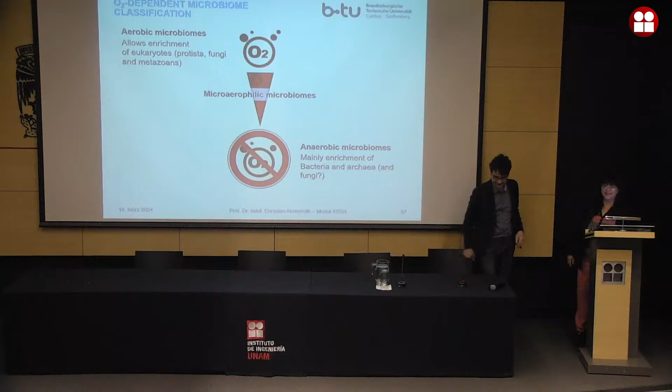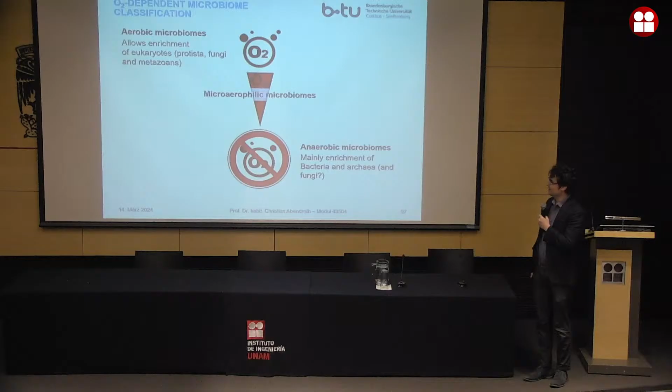Okay, welcome everyone to our lecture today. Actually, we almost finished yesterday, we just had 2 slides left, so we will finish these 2 slides and then move to the next topic. I already provided this file to you, so you should have it by now. It's basically a summary which is missing.

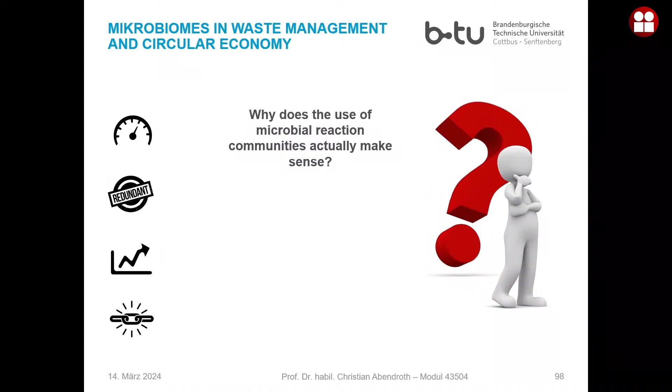So we ended with the classification of microbiomes into aerobic and anaerobic microbiomes, and also this intermediate with microaerophilic microbiomes. We also discussed which advantages the application of microbiomes has. You gave some good answers, and here's just a short summary. I searched for some sources supporting this information. For example, microbiomes allow a rapid conversion of almost all organic compounds because we have a high metabolic diversity. We have a really high redundancy and high adaptability, which is also what we discussed.

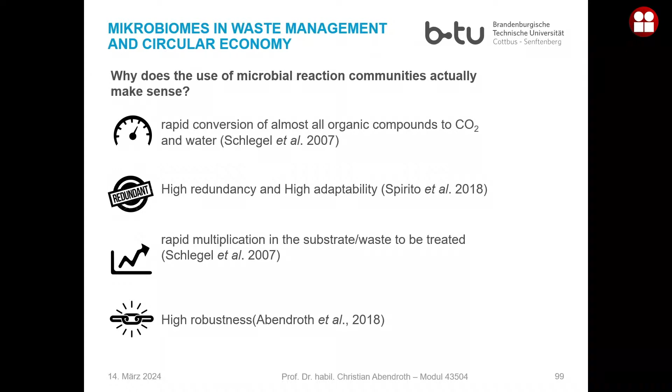We have a rapid growth, so there are many microorganisms which can grow relatively fast, and after a short while you will reach already a high cell density. And lastly, there's a high robustness, so it's really difficult to change the microbiome in order to change its functionality. It's really hard to disturb the process. Usually you can throw everything into a biogas plant and then the microbes are doing the job, and in the end you're getting a lot of methane.

So with this, the last chapter from yesterday is done, and we can shortly summarize it. We talked about oxygen and the possibility to separate different microbiomes based on oxygen. We also talked about the possibility to use oxygen to fasten up microbiomes, which was really important for wastewater treatment, but this does not allow the accumulation of really valuable metabolites that we could use to sell to the industry.

This is then possible with anaerobic conditions, where we have very low redox potential, and oxygen is not the final acceptor for the electrons, and therefore we have not a complete degradation of most of the substances that we have present, and thereby we are producing methane or other substances of interest.

Although this is nice, it's really difficult to enrich microorganisms under anaerobic conditions. They are washed out easily because they grow slower than with oxygen. To circumvent this problem, we can apply some growth bodies, or we can use UASB reactors where we have some selection pressures that support the formation of granules. We can also use a membrane reactor to somehow retain the biomass in the reactor.

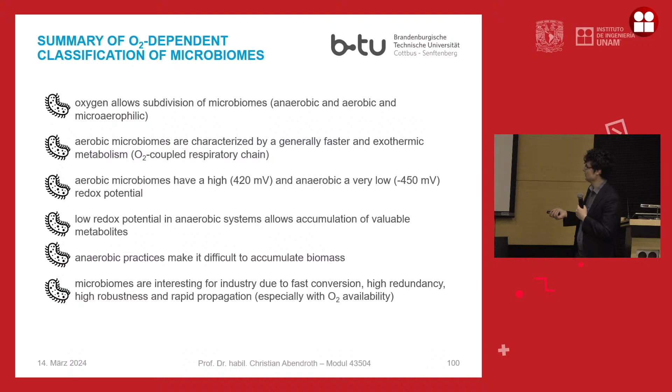So that's it, we are done with this, and now we can already move to the next presentation. Can you please change the slide, yeah, thank you.

Okay, thank you. Then let's start with our lesson for today. So today we talk a little bit more about engineering. We are leaving for a moment the biological perspective, and we will talk more about anaerobic digestion, how it's working in general, and we will also talk a little bit about dark fermentation.

So what is anaerobic digestion? What do you understand under anaerobic digestion? Yes? And how does an anaerobic digester look like? Yes. But can you imagine a reactor, how the reactor would look like? How would we perform anaerobic digestion? How would we start the whole process? You don't know? Anyone else has an idea?

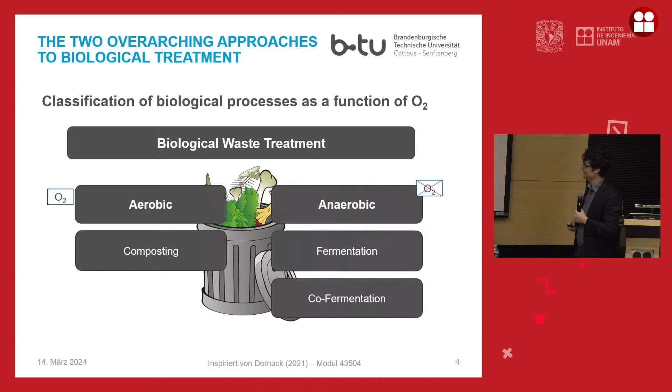Then we have these systems here: composting, and here I differentiated between fermentation and co-fermentation. Very often we apply co-fermentation in the field of biogas production, but sometimes we also have fermentation where we have just one single substrate.

This is, for example, the case in wastewater treatment, where we have just this sludge that we are receiving from the waste activation or sludge wastewater activation, and then the sludge is brought into a digester where we are producing biogas. We could also think about having a bioreactor filled with manure, and then we feed it with a certain substrate. If we just use one single substrate, this could also be a fermentation and not a co-fermentation.

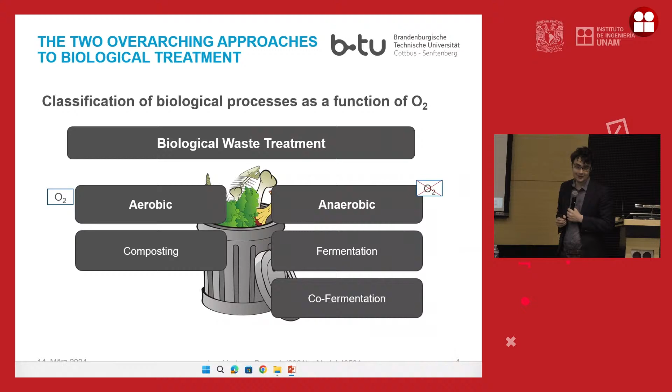Usually a stirrer is still inside, but that's basically all. It's a really simple system that you fill with an active medium. Very often in Germany we just use cow manure, which contains all the microorganisms we need to produce biogas. Once the whole thing is filled with cow manure, we can feed it - we take some solid biological waste and feed it into the biogas plant, and then all the microbes eat it and convert it into biogas.

The biogas is collected, as you already mentioned, and then we can incinerate it in a CHP plant to produce electricity and heat. We also have the digestate, that's what you are working with, as I understand.

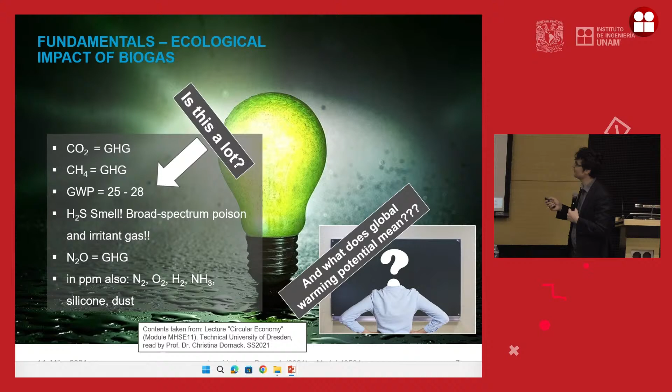But then there are some gases which are much worse than carbon dioxide, as for example methane. So if you don't know the term, I will not ask the question whether it's a lot, because then I have to explain the term first.

So the global warming potential describes a relation of other gases to carbon dioxide. For example, methane has 25 until 28 times the global warming potential of carbon dioxide. So it's 28 times worse than carbon dioxide. Of course, we don't want the methane in our atmosphere therefore.

So it's much nicer if we collect it, then we incinerate it. By this, we get some energy. And after incineration, it's just CO2, which is less dangerous for the atmosphere than the methane.

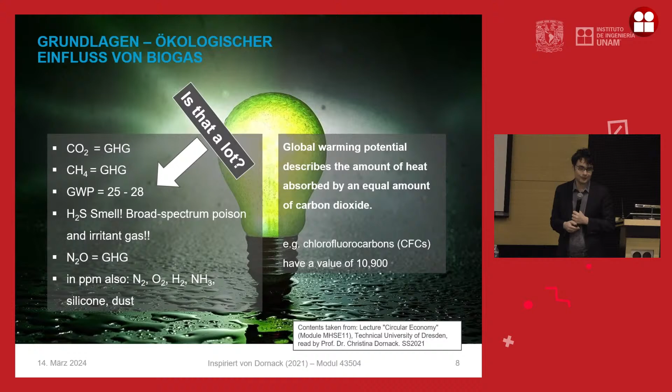There are some gases which are much, much worse. That's why I was asking, is this a lot? For example, there are chlorofluorocarbons, and they reach a value up to 11,000. So they are 11,000 times as bad as carbon dioxide. And of course, these gases should be forbidden.

I don't know whether this is always the case in every country, but at least in Germany, it's not allowed to use such gases for industrial processes anymore, or at least it should be reduced to a minimum.

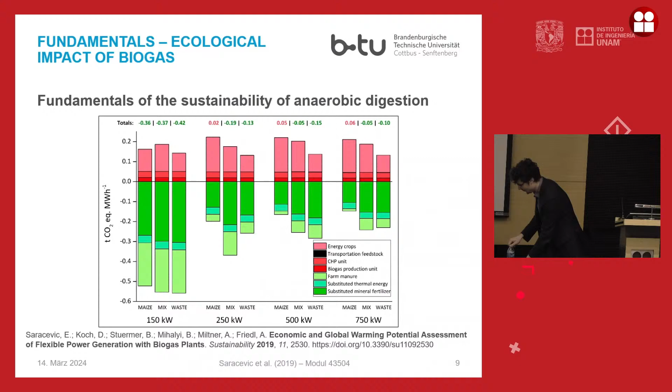So I don't know whether they did this based on a life cycle assessment. I don't know how they calculated this exactly, I would have to read the article again. But we could assume that with life cycle assessment, you could make a graph like this, estimating the production of CO2 and the savings. So we could use such a method to show this.

But assuming that this is all true, what we are seeing here in this diagram, and I would believe it's true, it's still strange that the small plants are so sustainable. So why are these small plants so sustainable?

No idea? Anyone else has an idea? I'm guessing, reading from the graph and using the information from it, that the most CO2 we save is from substituting thermal energy and substituting mineral fertilizer. I'm guessing for larger plants, there's not enough production of energy or fertilizer for it to fully substitute the amounts that need to be used. So that is why you don't have as much savings. There's another reason, though.

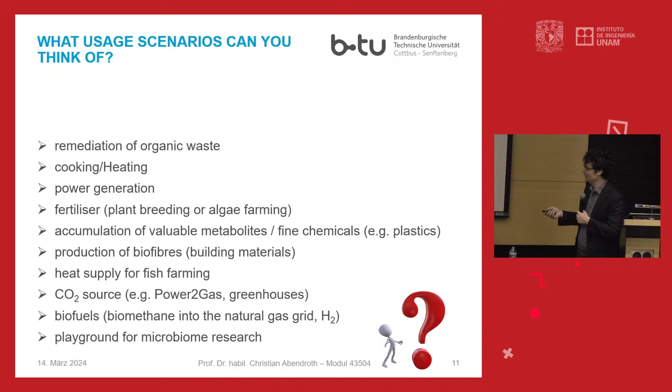We can also use the heat directly at a fish farm connected to the digester to heat up the water. We can also use the CO2, because usually we just incinerate the biogas, but then we have a high concentration of CO2, and it's difficult to get gases with very high concentration, very pure CO2, and you could use them, for example, in greenhouses to better grow plants. You also mentioned biofuels. And then, of course, we can add the research to understand how microbiomes are functioning, to just better understand this microbial level. Okay, nice, you got most of the options.

So, as I told you in the very beginning, we can differentiate between monofermentation and co-fermentation. And apparently it's problematic to just perform monofermentation. I wonder whether you have any idea why is that—why is it not so efficient to just perform monofermentation? What problems do we encounter here?

Imagine you have the biogas filled with sewage sludge and now you feed in some glycerol. Does it matter whether you're just putting in some glycerol or additionally some bio-waste?

Maybe if you have only one substrate, you could have a lack of some special nutrient. Yeah, that's maybe right, you can absolutely need to add it—a disbalance of nutrients. Perfect. Anything else? Any other ideas?

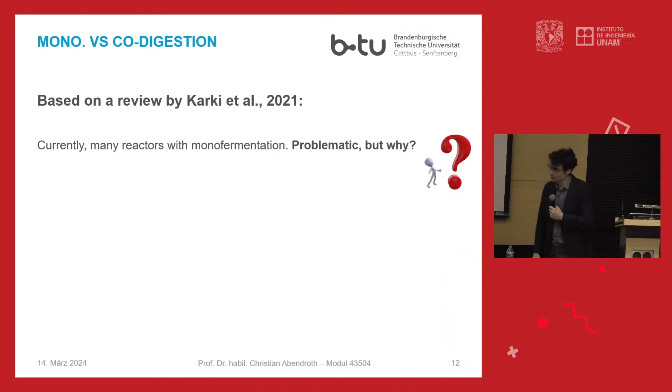Other ideas? Okay, then we will just go through it, and you named already a lot of it. There are a few things missing. There's a trend towards instability, accumulation of heavy metals could happen. It could happen that a substrate is not available over all the year, so maybe in summer we have a lot of green waste, and in winter we don't have anything to feed into the biogas plant anymore. Maybe this goes into the direction of what you said.

Then sometimes the methane ratio is also affected, so we just have a very low quality of biogas. We could have a rapid accumulation of organic acids - that's what you said in regard to pH control. And there's important enrichment of nitrogen or ammonia.

This can become really easily toxic. If you have too much ammonia, the microorganisms will die or become really slow, which is also quite problematic. It could also happen that you have an imbalance which yields more production of hydrogen sulfide. This is always a problem because it's extremely corrosive and could damage your CHP plant, where you're incinerating the biogas eventually. You could solve this with a desulfurization plant - there are systems to cope with this problem.

Well, the solution is easy - we just have to use co-ferments, always using several substrates in order to circumvent these problems. Sometimes this is not possible, so if you still want to do mono fermentation, you can do so, and here are some strategies how to overcome these problems.

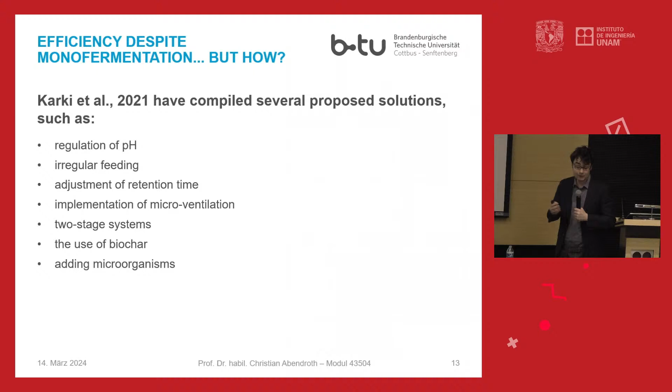So why is co-fermentation now so beneficial? I will just resolve it - we basically discussed it already. We have a balanced nutrient ratio, that's what you mentioned before. We have a higher microbial diversity, that's what I think you were mentioning. We have a better buffer capacity. We can also dilute inhibitory substances - for example, if we feed a lot of chicken manure, it's usually quite enriched in ammonia and nitric substances.

Usually it's very difficult to make a mono fermentation with chicken manure, but if you have some part chicken manure and some corn silage and some manure, you can already reduce the inhibitory effect of the ammonia. We can decrease antibiotic-resistant microorganisms, which is also nice. We can reach a better quality for the digestate because we have a better distribution of minerals. The nutrient availability can be increased because of better mineralization. And sometimes people also try to produce biochar from the residues of the biogas plant, where you could also achieve a better quality for the biochar produced from the digestate.

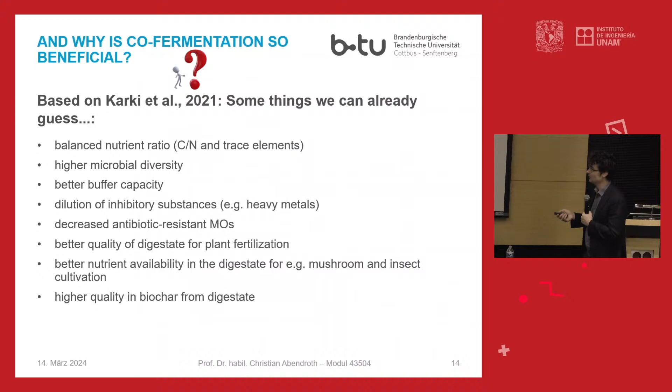To highlight this problem, people introduced the so-called co-digestion performance index, or CPI. If the CPI is below 1, it means there's a problem - it's not useful to combine the substrates you are combining. If it's just 1, there's no effect, so you could also go for monofermentation. But very often you have a CPI higher than 1, which means there's a synergistic effect you could use

to increase the efficiency of your biogas plant. I looked for one example here, also from Karki et al. He found a CPI value of 1.9, so he could basically double the efficiency by combining pork manure with corn stover and cucumber residues. This is much better than digesting each of them on their own.

When talking about different co-substrates, not all of them are degraded very well. Here's a simple overview on what substrates are usually suited well for biogas experiments or biogas plants. Usually it's really good to have simple sugars, short carbohydrates, amino acids - things that can be accessed very easily by the involved microorganisms. Then we have fat and oil, which is classified as moderate. Why is that?

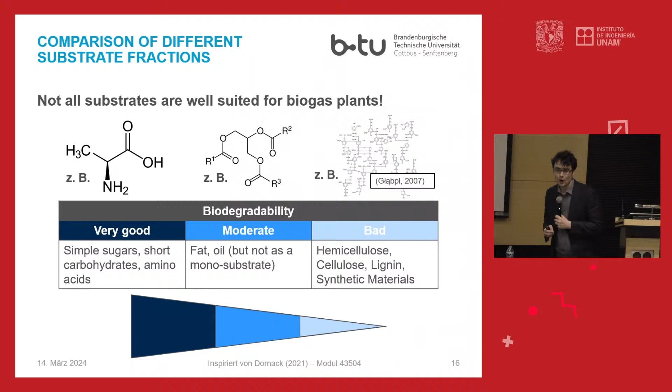And then we have the substrates which are degraded really badly. We discussed them already before, like lignin especially. Here's a picture of one possible formula of lignin, which is just too complex to be degraded efficiently.

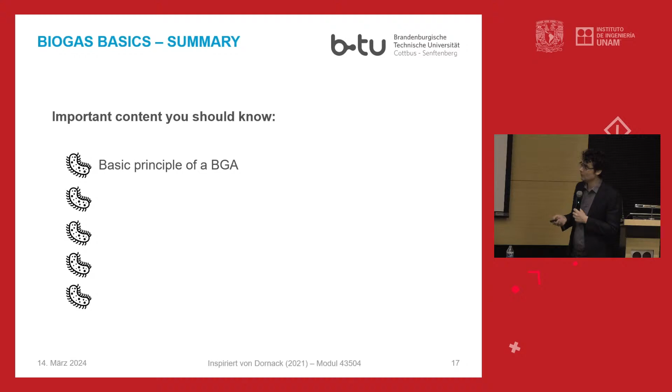Those are our basics for biogas production, and I will summarize this shortly. We discussed the functionality of a biogas plant, the composition of biogas and its ecological relevance. We compared monofermentation versus co-fermentation, and introduced this co-fermentation performance index. Finally, we discussed the degradability of different classes of substrates, differentiating between substrates which are easily accessible, which are in a medium scale, and substrates which are really bad to degrade.

You can actually pretty easily calculate the amount of biogas that you are expecting from your substrates. This is demonstrated very easily based on sugar, based on glucose. You can basically count the carbon atoms, and you know that each carbon atom ends up either in carbon dioxide or in methane. Then you can count the oxygen atoms - with 6 oxygen atoms, you can produce 3 CO2. And then the remaining hydrogen goes onto the remaining 3 carbon atoms, resulting in 3 methane molecules.

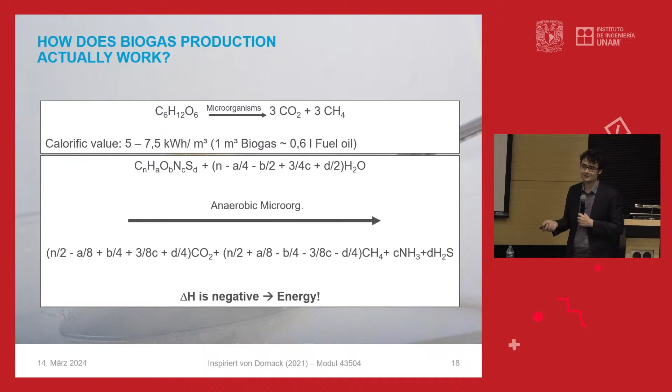Another reason is that inside the cow, basically the same processes are happening as in a biogas plant. That's why manure is so good for starting up a biogas plant. We differentiate four phases: hydrolysis, acidogenesis, acetogenesis, and methanogenesis. Have you heard of them before, or is this completely new?

You know it, but you're working on it in the field. What about the other ones? You're shaking your head. So the other ones you're not sure about? Yes or no? Yes, you know it — okay, so it's not entirely new.

I will explain it very shortly. Hydrolysis is a colloquial term — we try to dissolve substrates in water to make them accessible. This can also be supported enzymatically. Imagine the cow chewing a certain substrate, it gets smaller and smaller, and then the small particles are hydrolyzed, getting them all into a watery phase.

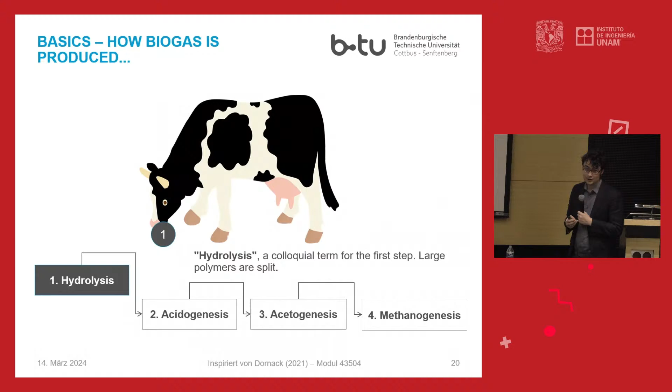Now we have it accessible for microorganisms and they start to ferment. This is called acidogenesis because, as the name says, a lot of acids are produced. We also produce some gases like hydrogen, carbon dioxide, and hydrogen sulfide, but also alcohols and many different organic acids like acetic acid, propionic acid, butyric acid, caproic acid, and valeric acid — a wide range of acids that we're enriching throughout the process.

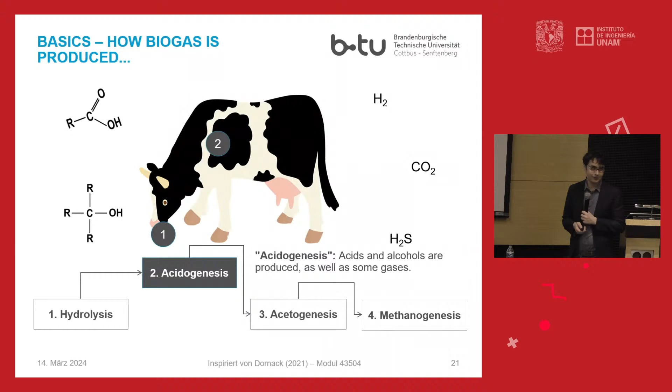In the next step, we have degradation of these acids. They get shorter and shorter until in the end acetic acid is left, along with hydrogen and carbon dioxide. This process actually often occurs syntrophically.

Has anyone heard of the term syntrophy? You're shaking your head, no — you're nodding, yes. What does it mean? Syntrophic means that microorganisms are working together — one produces something that the other needs. Okay, then how is that different from a symbiosis?

I don't know how to explain it. Okay, you can think a moment. Maybe the other ones have an idea — what's the difference between syntrophy and symbiosis?

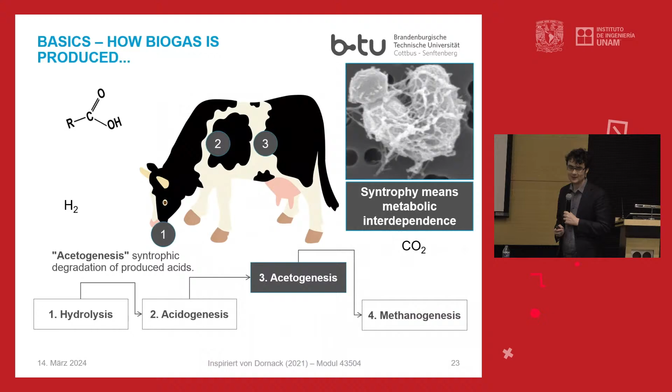Okay, and then we have the last step, the methanogenesis, where we are producing the methane and the carbon dioxide.

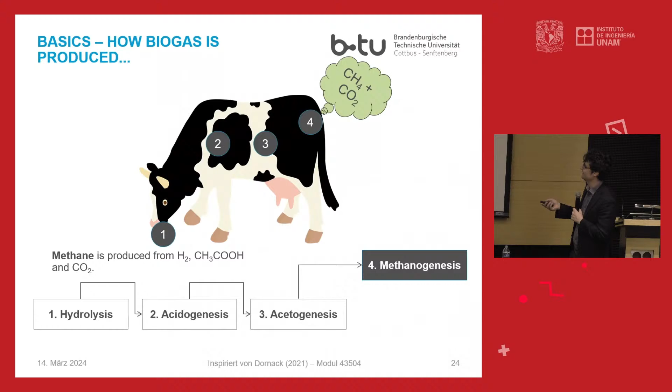Then the hydrogen, the carbon dioxide, and the acetate are already nice substrates for the methanogenic archaea to produce methane out of this. And the longer organic acids are further degraded in the acetogenesis to make sure that only acetic acid remains. During this degradation, also some hydrogen and carbon dioxide is formed, and these are now the main substrates again for our methanogenic archaea.

Okay, now we also understand how this is biologically happening. And now we take a look at the technological level. So we will talk about different solutions for reactors, and we will start to differentiate between dry fermentation and liquid fermentation.

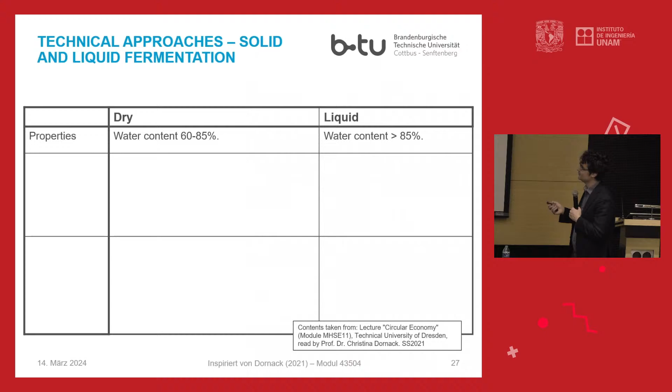So we are talking about a dry digester when the water content is between 60 and 85%. And when we are above this 85% water content, then we are already in a liquid fermentation. Both things have their disadvantages and their advantages.

The advantage is that we have a very small volume for the dry fermentation - we just need less space because there's less water present. But the liquid needs more space, but has the advantage that you can use conventional technologies which are well elaborated.

So when the first dry fermenters were constructed, that's relatively new. They don't exist for so long time, and a completely new technology had to be provided to make this possible. In the case of liquid fermentation, we had already some well-working reactor systems, for example, from wastewater treatment that we could apply here. So it was just more convenient to use the liquid fermentation.

There's a favorable material and energy exchange. It's really reliable, and the gas can leave the sludge much easier than if there's a really thick matrix.

Well, the disadvantages are that the volume for the liquid fermentation is really large, and there's a larger effort because of this also for solid liquid separation. And then for the dry fermentation, the disadvantages I mentioned already - we need very specific equipment in order to make them work.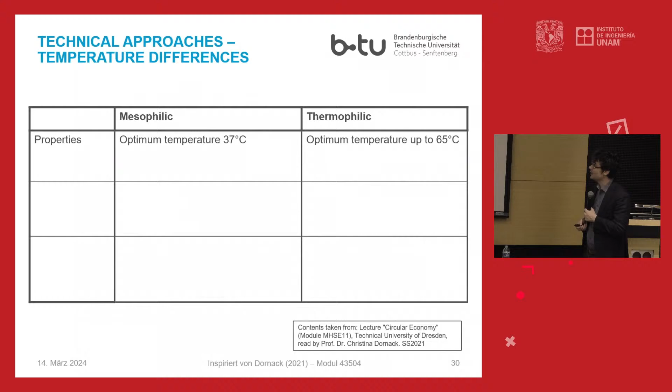Again, we have advantages and disadvantages. An advantage of mesophilic digestion is a good process control, so it's really easy to keep the system stable, but you also have less process energy requirements because you don't have to heat the reactor so much.

If you have a thermophilic reactor, you have a higher decomposition rate, so you just produce more biogas per time, which is nice.

Also, you have disinfection because all the pathogens that can grow on us are adapted to the same temperature as we are - our temperature is 37 degrees. So usually pathogens are also growing at 37 degrees. And when we now work at 65 degrees, then pathogens just don't have the right temperature.

Yeah, we could also recover the heat actually in order to save some of the electricity costs.

Well, then we have some disadvantages. In the mesophilic one, we don't have the disinfection for sure, so the pathogens can thrive. This is actually not the case in agricultural plants - usually if we have fiber-rich material, there are not so many pathogens growing. But if you think about sewage sludge treatment, then 37 degrees is the perfect temperature to make microorganisms thrive under these conditions.

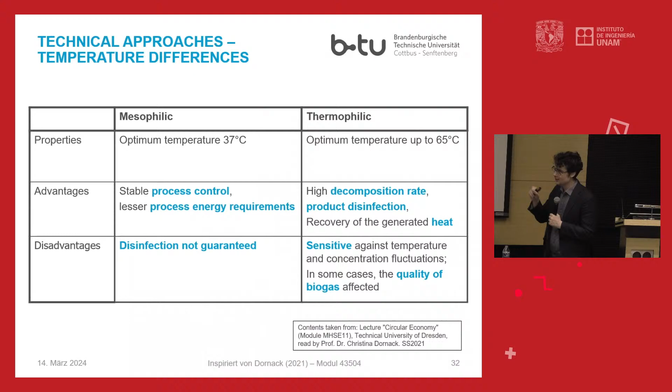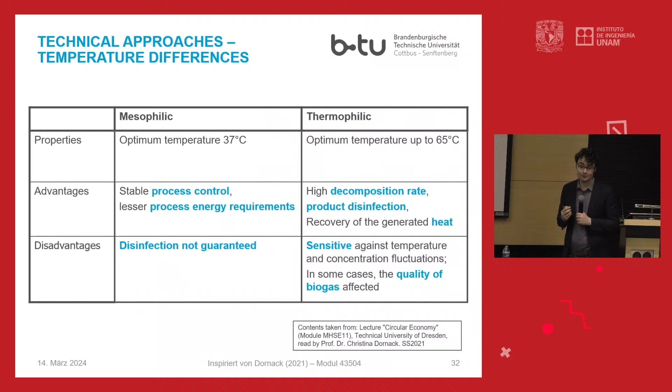If you start at 65 degrees, it will be really inefficient. It is recommended to start at 37 degrees, and then increase the temperature daily by a small amount until you reach, after several weeks or months, 65 degrees. So it takes quite some time to make it work at thermophilic conditions.

Then we have single stage and multi-stage reactors. Regarding the properties, it's already said in the name: we have only one stage in the single stage reactor, and in the multi-stage reactor we have actually many reactors that we are combining.

The advantage is that a single stage is just really simple. But with multi-stage, you can reach higher process stability.

It's also less affected by certain disturbance parameters. For example, think about acidosis, when you have an unbalanced process, a lot of acid will accumulate, which will eventually kill your reactor. This can be prevented in a multi-stage process.

You can produce all the acid in a dark fermentation-like manner in a first stage, and then feed the acids on demand into the second reactor where you have methanogenesis. So you don't have an uncontrolled release of acids, and therefore the reactor is much more stable.

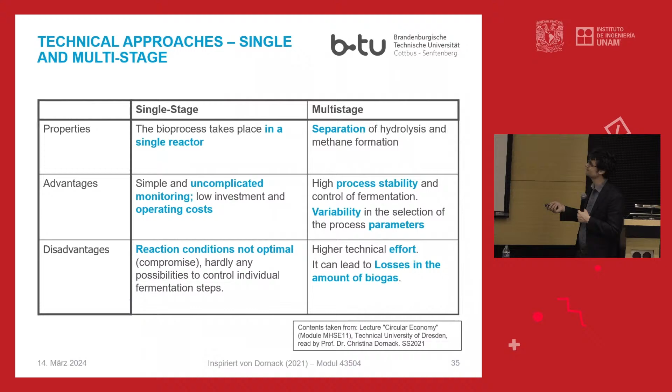We can cluster the wet fermentation and dry fermentation further. For example, in wet fermentation, we can distinguish between a discontinuous process and a continuous process. I suppose as engineers you have heard of this before, so it's maybe not that new.

A discontinuous process is usually called a batch process or a storage method. What does this mean? Do you know what a batch process is? Have you heard about this before?

Like you treat a certain volume at a time, so you put it in a reactor, and then you take it out and put another one in. That's right.

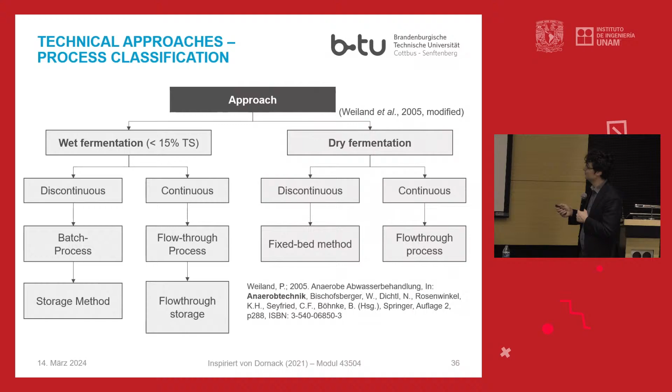We will start with the first ones, with wet fermentation, and here we have the batch concept. So you have the reactor, the biogas reactor, with some input. Then the volume is increasing and increasing until we reach the maximum filling.

Once this is reached, we pump it all out of the reactor, and then we start again. We leave a little bit inside in order to inoculate the whole process, to have some microbiota that can work here.

This is now a flow-through plant, because if you're feeding continuously and releasing continuously, you have to leave your material somewhere. For this, you have a second storage, which we also call the digestate storage.

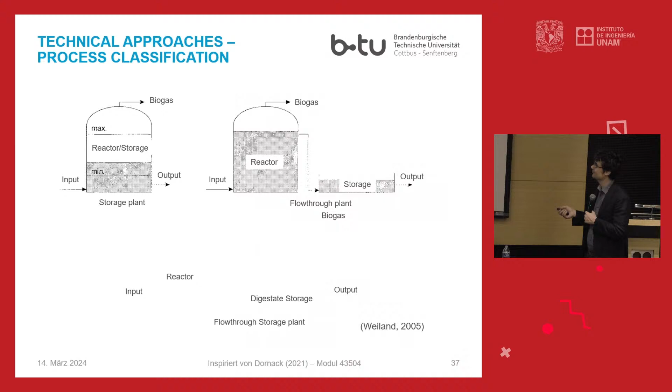This process exists, but it's much nicer if you combine it with some gas collection in the digestate storage as well. This is a system we now usually find in Germany: you have your biogas reactor, you feed it continuously, your material goes into the digestate storage, and here the digestate is kept without much controlling. It doesn't contain so much substrate anymore, so you're not heating or steering it, you just leave it as is. There is some residual gas produced that you're still collecting, together with the biogas from the main reactor, in order to minimize the losses in biogas.

Usually these systems work like a continuous stirred tank reactor, and this is a really simple system. You basically have a vessel with a stirrer inside, and you're continuously stirring your material inside these reactors. To make it a bit more accurate, one could draw in the stirrers as well.

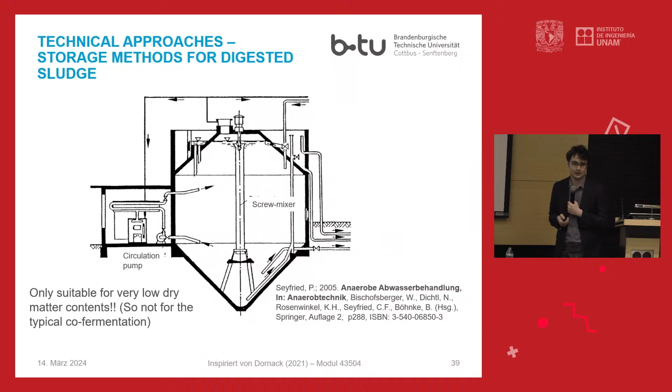I would probably apply it to sewage sludge, because if you want to mix your reactor based on a circulating pump, this is quite some effort in a normal biogas plant. In a co-fermenter, in an agricultural biogas plant, you have very high solids, let's say 10, 12%, and it's quite some effort to pump them. So usually you have a big stirring system. There are also some pumps because you have to transport your sludge, but it's less convenient to circulate sludge by pumping—this would cost quite some energy.

We also have such systems, but they are not really common. I guess they were rather experimental. I've never seen such a system in the industry, at least, but apparently they have been applied.

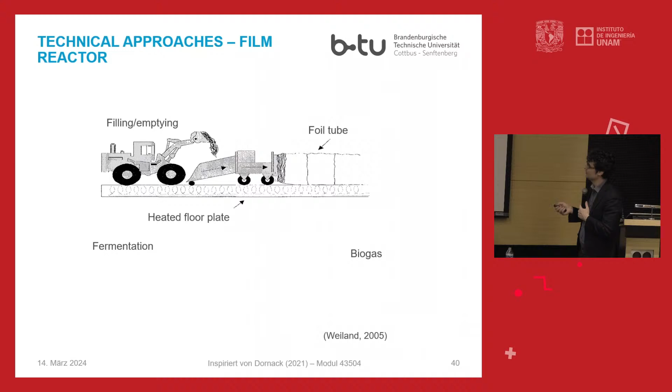It's a foil reactor. You have a foil, and a filling mechanism where you put in your substrate with a wheel loader. You're filling the whole foil, putting it onto a heated floor, and in the end you're connecting some gas pipes where the gas could be released.

I could imagine it's just too much effort. I don't know how stable this foil is—if you always fill it and remove it again, maybe the foil gets destroyed easily. And if you just place it on these heating plates, maybe you have heat losses. So to me it looks not so efficient, and I've never seen such a system in the industry in Germany. I could imagine that people only tried this on an industrial scale, but it's not really dominating the biogas landscape in Germany.

Here's another reactor for solid fermentation in a heap system. It's a bit similar to a composting system. You have this heap, and usually you close it to keep it anaerobic, but sometimes you have to open it to put in some substrate. You put your substrate here, remove your residual digestate here, and this results in some oxygen inflow—meaning the input is quite oxic, and the layer behind the input also gets enriched with oxygen, so it's also aerobic, and then it becomes facultative. The further away you are from the filling part, the more anaerobic you are.

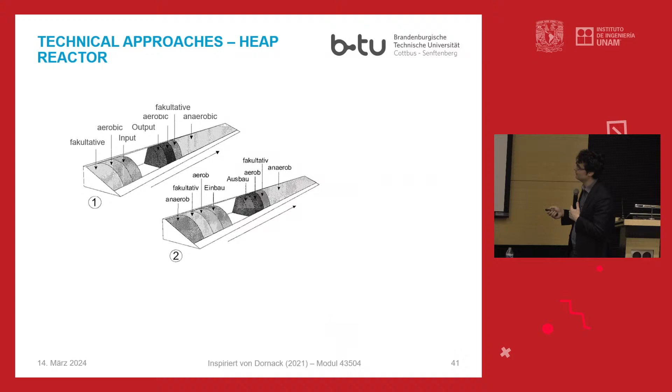Here you have a long fraction of anaerobic sludge or manure, which produces a lot of biogas. After this filling procedure, you close it, ferment for a while, then open it again, put another pile of substrate here, attaching it to this part, and remove the part which was previously here. Then you repeat this, so the filling gap wanders in this direction, and once you reach the end, you can restart.

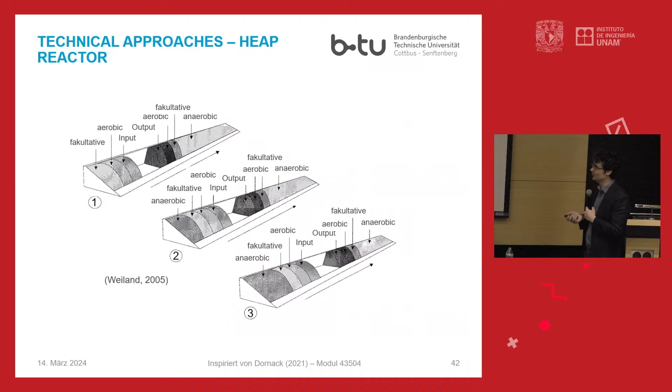I haven't seen this system either, I have to say. I could imagine there were some industrial experiments with this, but this is also not a typical kind of biogas plant that I have seen in the industry.

And in regard to dry fermentation, a system which is used very often is this garage system.

We really call it a garage because you can drive in with a car, and they are actually doing it. So they take the wheel loader and pile up the biomass inside. Afterwards, they close this garage and it starts to produce biogas.

To achieve this, they have a liquid phase which they're sucking up from below, and then pumping it into the top, where it's trickled over the solid bed, over the pile of biomass, in order to always have some liquid film on the pile of biomass. Once you're done, you empty it out again, and then you can fill in the next pile of biomass.

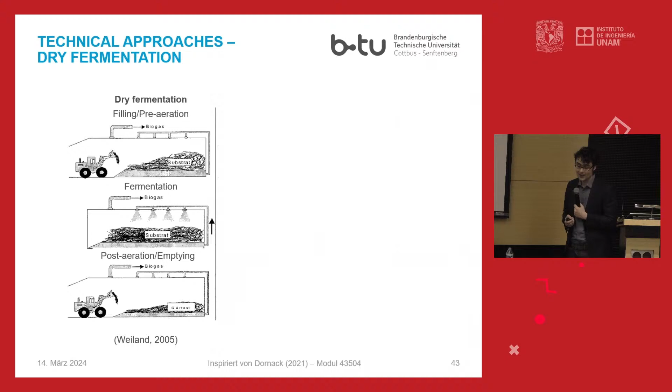This works, but this system has a problem, because since you have so much substrate in it, it's possible that you're accumulating the organic acids too fast. With these organic acids, you will inhibit the methanogenic archaea, which are extremely sensitive to pH. So it could be that for a long time nothing happens, and then after quite some waiting, methanogens will adapt and eventually produce methane again. But it will take quite some time, and you can circumvent this problem.

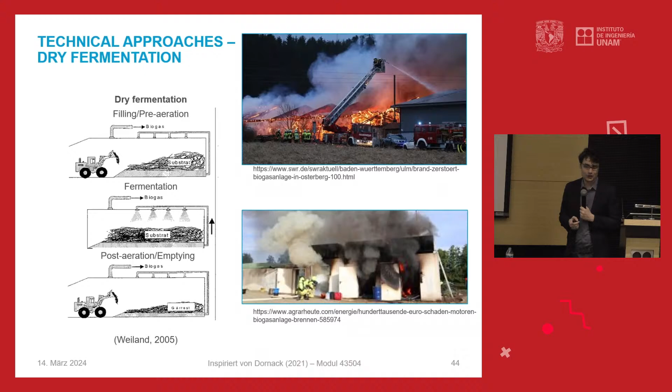I'll come back to this later. I wanted to highlight that it's not recommended to smoke in these plants, and yes, there are accidents that have already happened. If such a plant catches fire, this can be huge. So no smoking close to a biogas plant.

So now we come to the thing I actually wanted to say. If you have too much acid produced, then the methanogens just won't work, and it will take too long. You can circumvent this problem if you have a liquid fermenter nearby with liquids.

You're trickling or spraying the liquids over your pile of substrate after filling, and the acids that are enriched here are then pumped into this liquid reactor. There you can easily degrade all the volatile fatty acids, and then you have material with less organic acids and higher buffer capacity, which you're pumping again onto your pile of substrate.

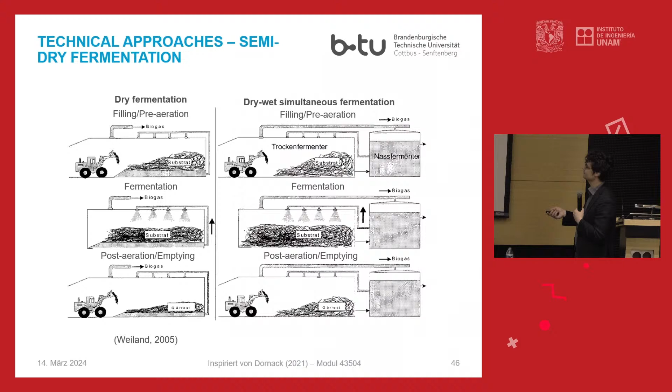You can also combine all these reactor types. For example, here you have a pre-pit where you collect some manure, and then you bring it into a wet fermenter where it's digested. Then you have your digestate, which goes into a post-digester, and from the post-digester into the digestate storage. This is an interesting concept which we haven't discussed so far.

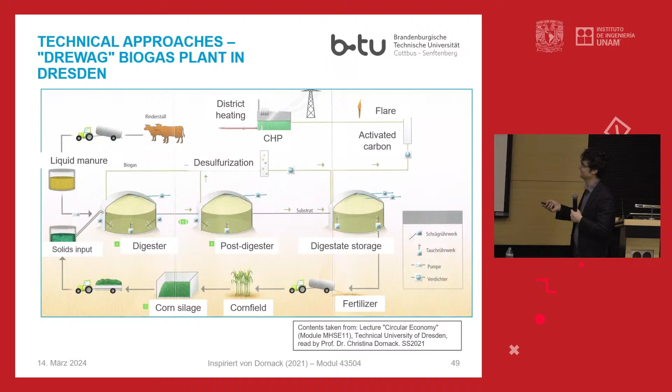Okay, thanks. You're welcome. Okay, any further questions? All clear?

Okay, great. Well, that's all that we are hearing about the technical approaches. Again, I will summarize this shortly for you. So we have here now this four-phase model with the hydrolysis, acetogenesis, and methanogenesis. We also heard about calculation of biogas yields, which are, of course, not to be fully trusted because not all substrates are fully degradable. We have to take this into account.

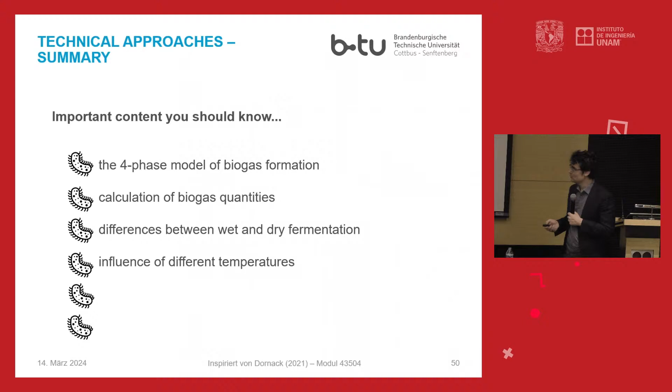We have differentiated between wet and dry fermentation. Also, we highlighted the influence of different temperatures, mesophilic and thermophilic. We saw a possibility tree for technological approaches that we can follow to build up our biogas plants, and we also saw some fermenter concepts, how we could actually use them in a practical scenario.

Well, now we come to the next topic, which is the dark fermentation. I don't know, do we have enough time left?

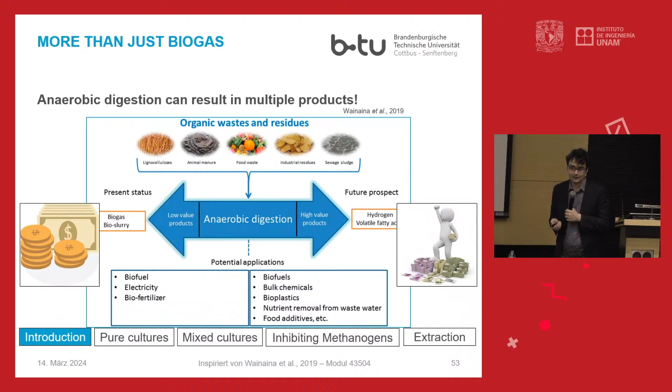But the volatile fatty acids could be quite interesting and could yield much more money in the end than just selling the methane. Here's a nice table on all the products that could be produced from the volatile fatty acids. The idea is that we have our waste, we produce our volatile fatty acids, we provide them to the industry, to the chemical industry, and then the chemical industry can produce a wide range of products with this.

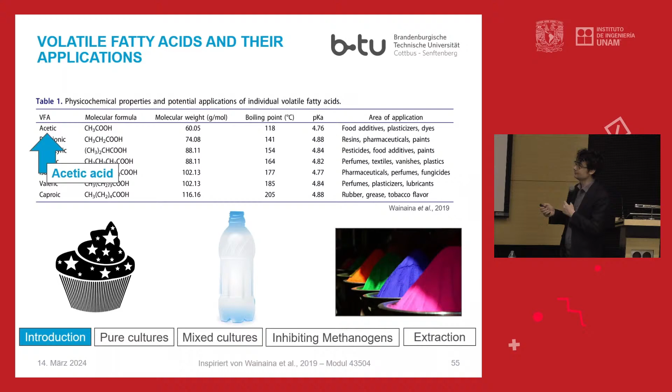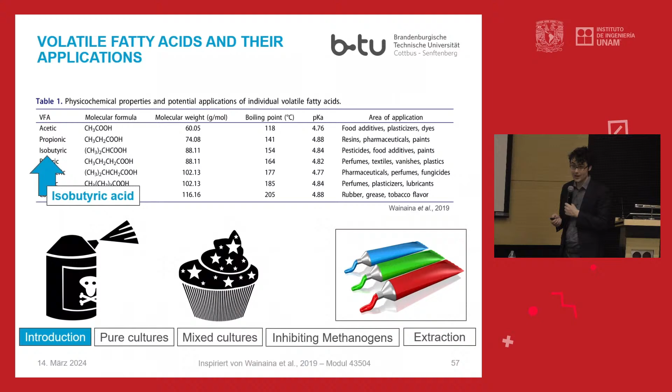For example, from acetic acid, we can produce food additives, plasticizers, and dyes. Or from propionic acid, we could produce resins, pharmaceuticals, and paints. From butyric acid, we can produce pesticides, food additives, and paints. This was isobutyric, sorry—here are the butyric acids: we can produce pharmaceuticals, perfumes, and fungicides.

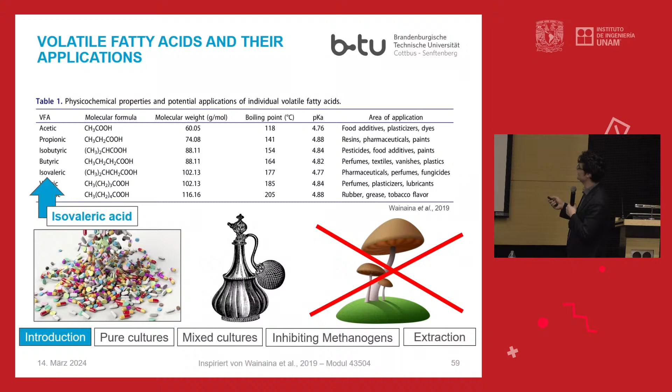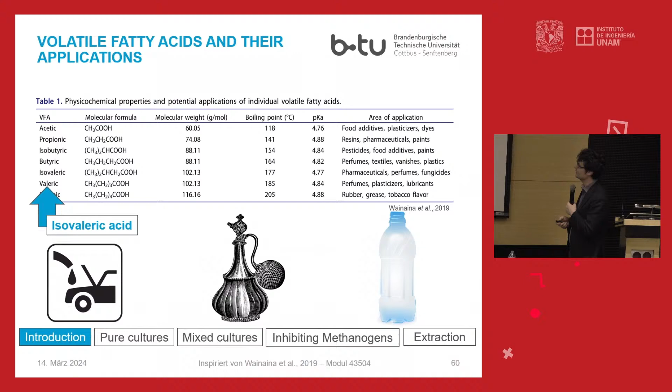Then we have the isovaleric acid. From the isovaleric acid, we can produce—I think I was jumping the line before. So we are now with the pharmaceuticals, perfumes, and fungicides, and we had the perfumes, textiles, varnishes, and plastics for the butyric acid. We have the valeric acid with perfumes, plasticizers, and lubricants, and the caproic acid with rubber, grease, and tobacco flavor.

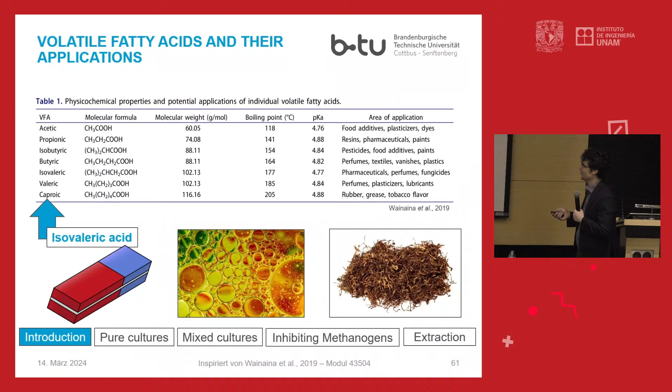So I think this is huge. There's a wide range of products that we can produce that we need and which are definitely more important or more expensive than methane. So how do we produce these organic acids?

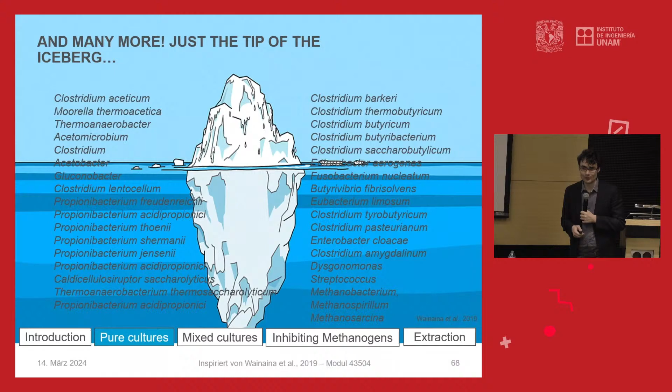We don't want to work with pure cultures because it's really expensive. We want to work with mixed cultures instead. They are much cheaper, and we don't have problems with contamination. If you have a really large batch and it gets contaminated, you can throw it all away, but this will unlikely happen in a mixed culture.

But in the mixed culture, we have the problem that we can't really control the outcome. How can we control that there is just acetic acid produced, or just butyric acid, or at least that we produce acids and no methane?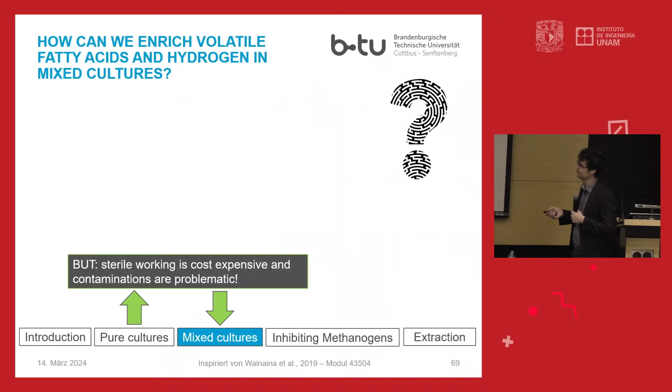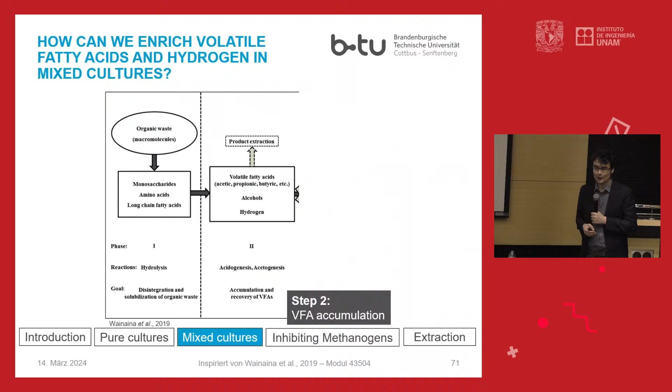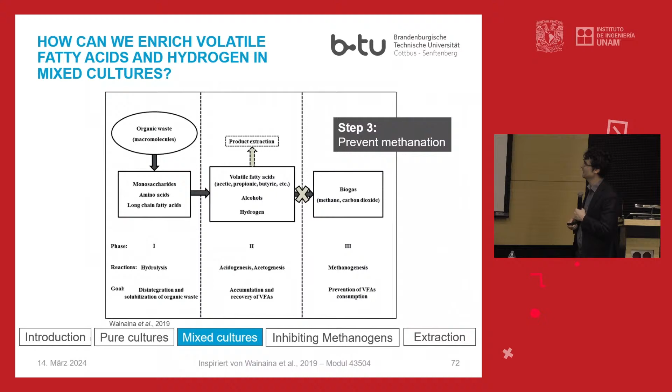For this we should take a look at the different phases of anaerobic digestion, starting with hydrolysis, where we disassemble all our molecules to make them accessible and easier to digest. Then we have our second phase, acidogenesis, where we produce all the organic acids, maybe also acetogenesis when we want to produce acetate. So these two phases are for acid production. Then we want to stop methanogenesis in order to make sure that all the organic acids are not further degraded. This brings us to the next point.

I don't know whether we still have time. We have 5 minutes. Yeah, we can talk a little bit further. So we can inhibit methanogens with pH.

There are different studies on how to manipulate acid production based on pH. For example, if you use a very high pH, you get more acetic acid. If you use a lower pH, you get more butyric acid. To achieve this you have to control your pH, because during fermentation the pH changes continuously, so you need some kind of pH control system. This pH control is also really nice for inhibiting the methanogens, since they're extremely sensitive to pH. Usually below pH 6, they're already quite inhibited and don't produce much methane anymore.

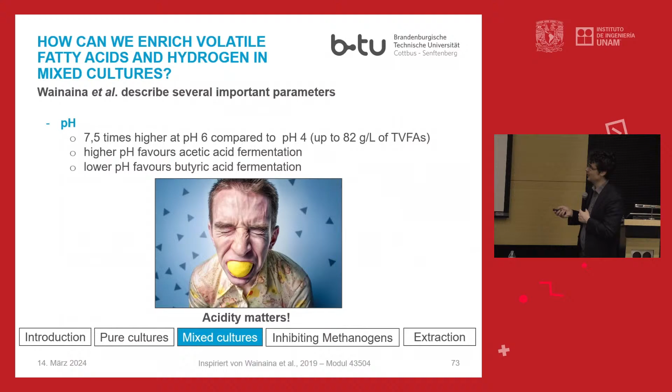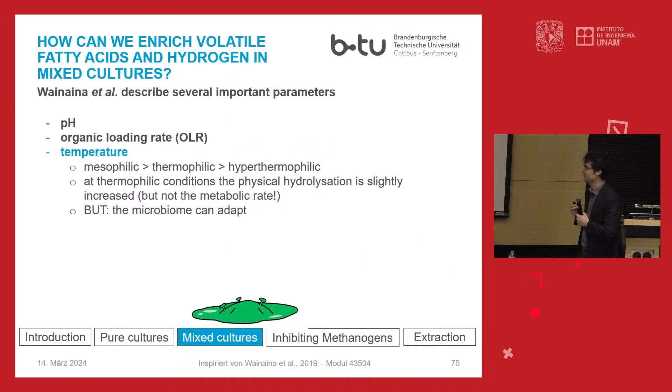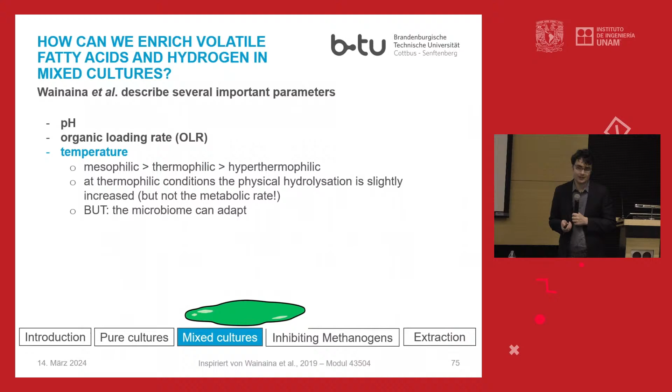We can also talk about temperature. There are different studies on how to manipulate acid formation, and generally people say mesophilic temperatures are better. With very thermophilic or hyperthermophilic temperatures, you could hydrolyze the material a bit better, but at some point the solution gets saturated, so this effect isn't so helpful anymore. But I wouldn't fully agree with this, because we've seen that thermophilic biogas plants are quite efficient, and I think it's about adaptation. If you adapt the whole microbiome for months to a very high temperature, you could also increase the acid production rate.

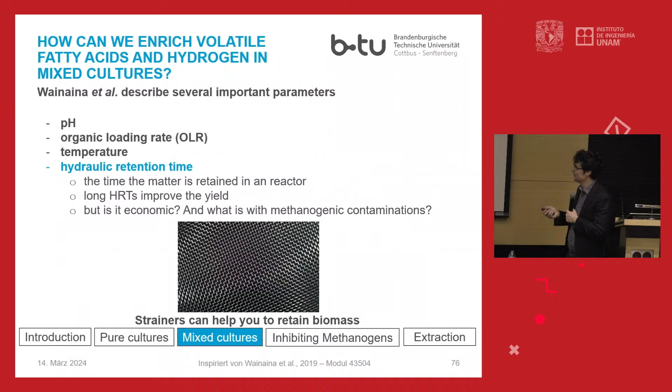We can also work on the hydraulic retention time in order to retain the biomass longer in the reactor, increasing the overall yield of acids we want to produce. But at some point it could become less economic, because if we have really high efficiency, we retain the material for a long time without adding new material, so it gets maybe less efficient. Also, the chemical equilibrium is really important—imagine this is our organic acid that we want to produce; if it's present in a very high amount, the chemical back reaction could be favored, so we're just not producing as much organic acid anymore.

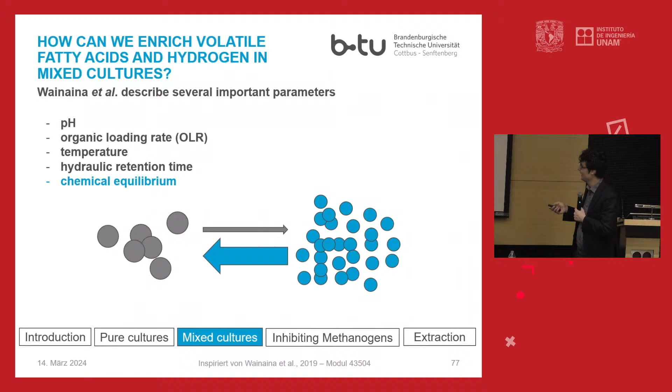So these things can all be used to manipulate acid formation, and we've already talked a bit about the possibility of inhibiting methanogenesis, which is something we'll have to finish tomorrow, because now it's 5.